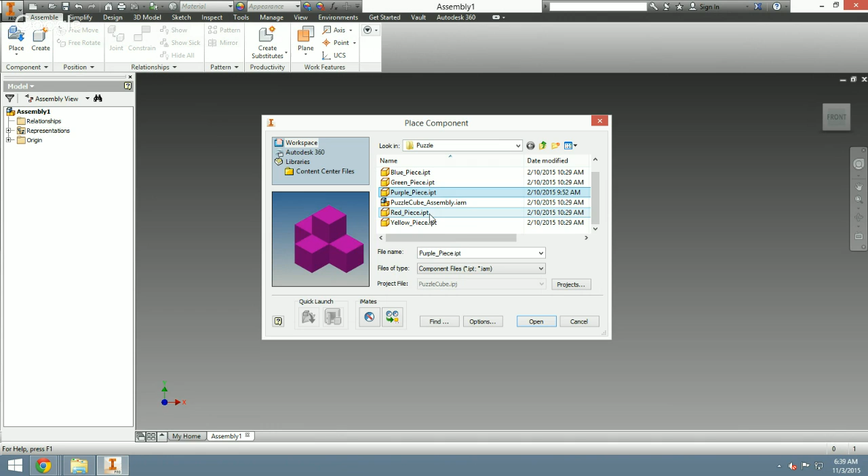I'm going to place my red piece and my purple piece because I know those two go together, and together they make one face of my puzzle piece. I'm going to make that face the bottom.

So I'm going to open up my purple piece first. Just left-click, and it'll place it for you. Then right-click and go OK, so you can stop placing those, unless you want multiples - you can place as many of these pieces as you want. We're going to go ahead and place our red piece right away.

One thing I need to do, because I did not set these pieces up to where they're all in the right orientation for my puzzle, I need to rotate my red piece so that it kind of fits into my purple piece. The way I do that, I left-click and select the piece I want to rotate, then right-click on it,

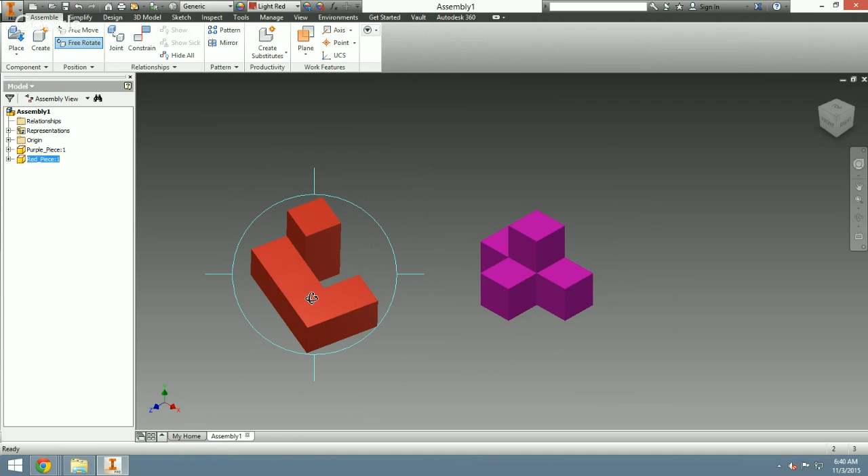and I go down to Free Rotate. What we're going to do here is just rotate our piece around until we feel it's in the right orientation to go into our puzzle piece. It does not have to be perfect, we just want a good orientation. Once we're done, we right-click and select OK. Notice this piece is going to go about in there. I don't have it perfect, but it's close enough.

The next thing I want to introduce you to is 2 constraints, and we're just going to look at 2 of these today. We're going to look at assembly constraints. Notice there's different tabs up here for different types of constraints. We're just going to be working with mate and flush.

So let's look at our mate constraint first. Notice here it has 2 selections that we need to pick. What mate does is that it takes 2 surfaces and basically puts them together. So what I need to do is pick my 2 surfaces that I want to mate together.

Now, this is the first constraint I'm putting on 2 puzzle pieces. It's not going to look like they're mated together or anything like that. We just need to trust that these 2 things are working. So make sure you have your first selection highlighted and then mate highlighted.

We're going to pick this surface right here, and then I'm going to need to move around. I love to move around using my view cube and just clicking the corners. And I want that surface right there highlighted. And now I already screwed up, so let me go back. I'm going to push cancel.

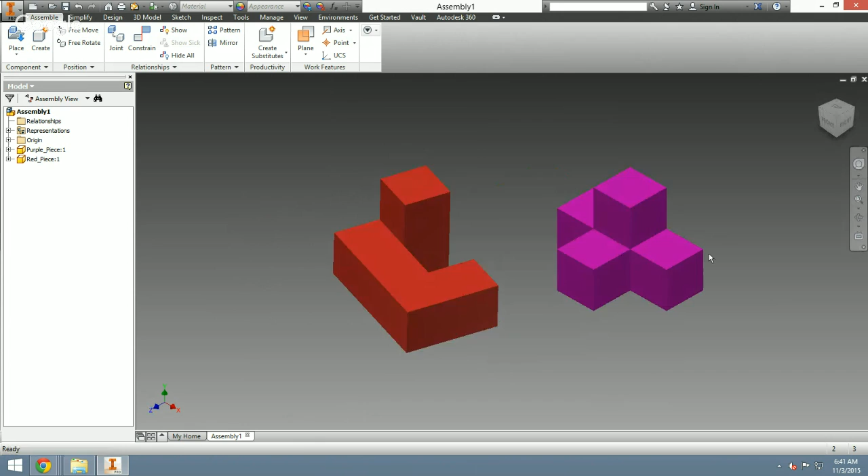One thing I forgot to do: I want you to right-click on the first piece that you placed, and go to grounded. Grounded means I cannot move it. So whenever I place or constrain a piece, it's always going to be the last piece I placed that's going to move to my grounded piece.

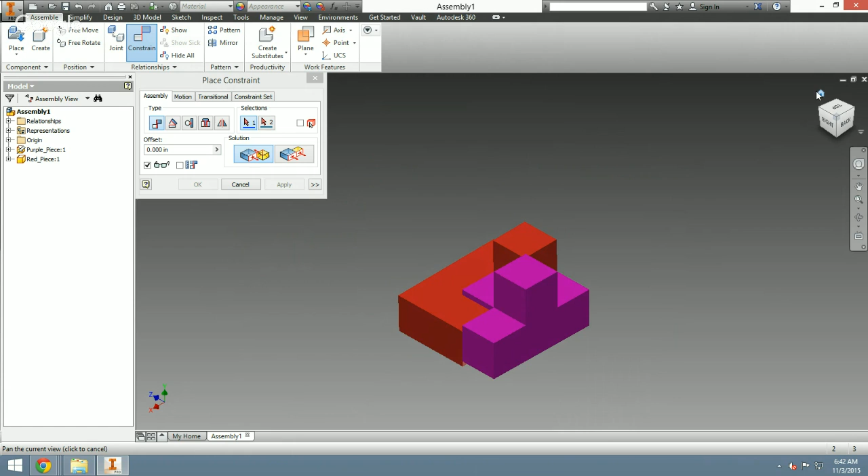Okay, so let's try this again. Constraint, mate, first selection right here, and then second one right there. And then I'm going to hit apply, then go back home. Now notice, it does not look like these two surfaces are mated together, but in reality they are.

When we get to our second constraint on this piece, it's really going to look like it. But we need to make sure it's all constrained. If I can move any one of your pieces when I come up to your computer, that means they're not fully constrained.

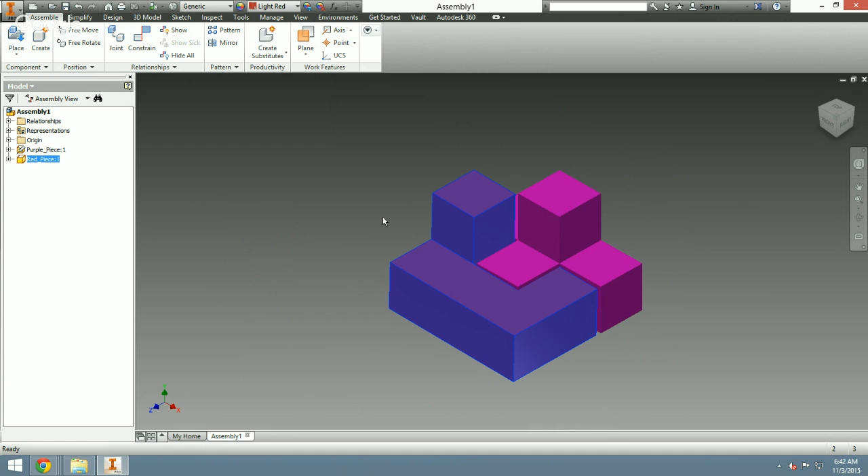Fully constrained here in our puzzle cube means we should have at least 3 constraints on every piece. So I'm going to go to constraint again, and here I'll use my flush constraint. Flush just means 2 pieces are exactly side by side, just like the picture looks. So the 2 surfaces I'm going to pick here are this one and this one.

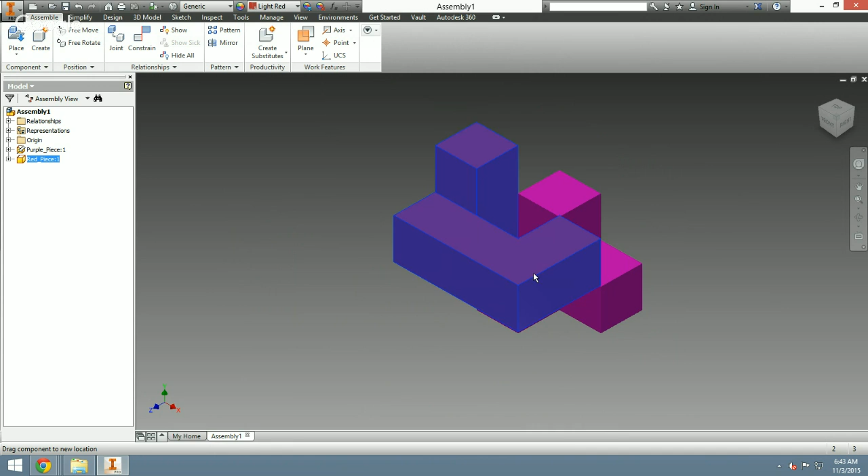Notice how that flushes that up really nicely for me. I'm going to just cancel out of that and show you. Now notice the only movement that I have is up and down. I can no longer go side to side or in and out. I just have up and down, and then we'll do our last one, which is another flush on this top surface and that surface. Notice here now, I cannot move my red puzzle piece.

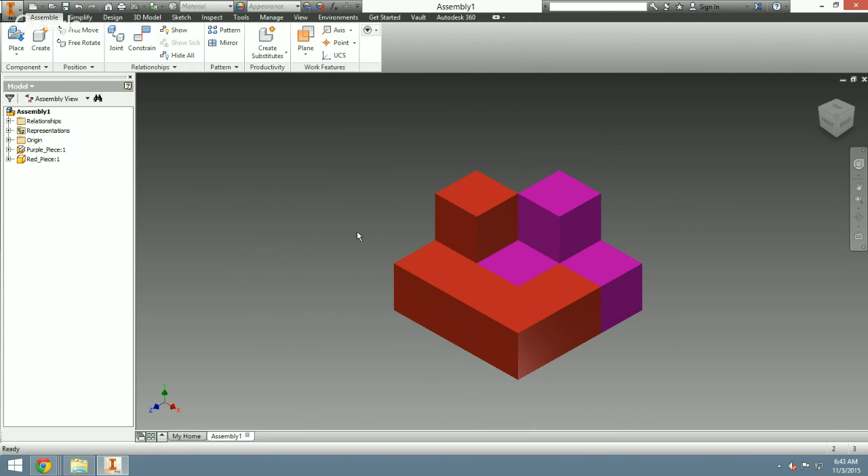Okay, so from here, I'm just going to keep on placing more pieces. The next piece that I know I need is my green piece. I'm just going to place that here. Again, it's not in the right orientation for me, so I'm going to right-click on it and go to free rotate, move it around a bit, and kind of go through the same process all over again. So have fun assembling your puzzle cube or whatever it is you're putting together.

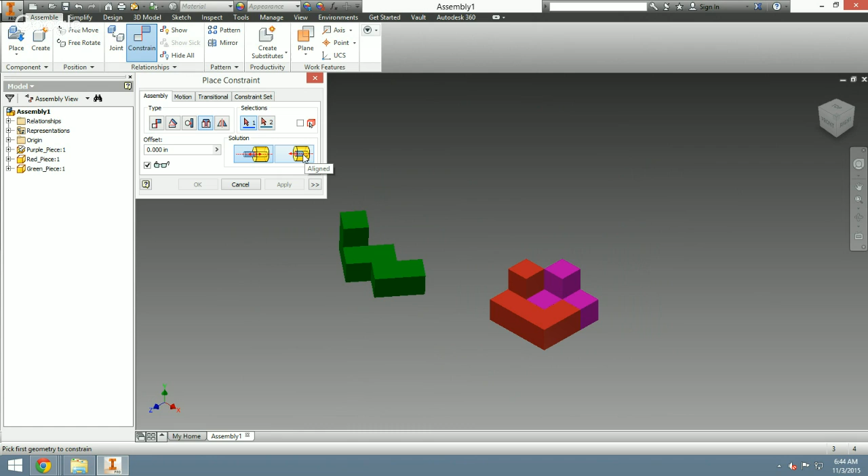We're just using these simple constraints right now. Again, there's more that I'll make more videos for later. One that's really, really important is constraint set. We should have not just assembly, but insert right here. So under assembly, there's even more. This insert constraint is really, really nice. So take a look at my video on the insert constraint.